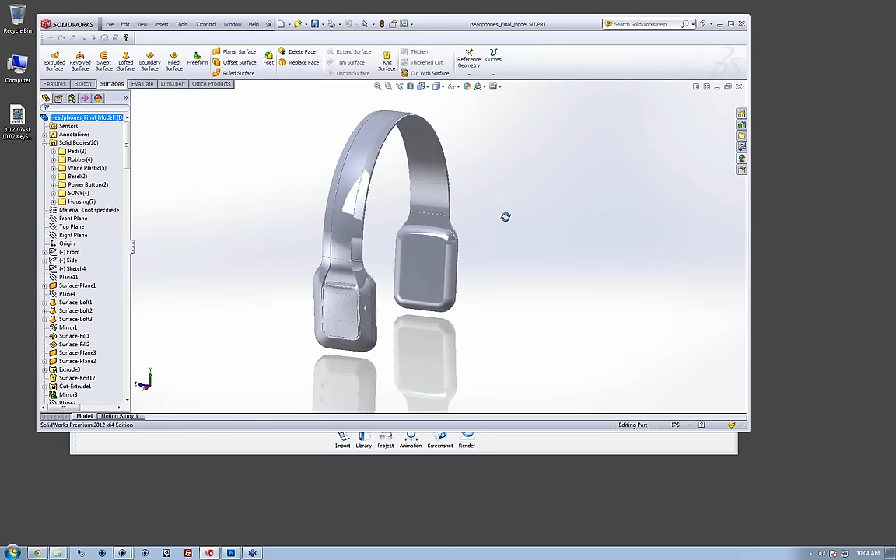So let's open SolidWorks. And as you can see, we have our headphones in a part file here in SolidWorks. And I haven't applied any colors to the materials yet, so I'm going to show you guys how I go about doing that. You could always import your model into KeyShot like this, but you won't have any definition between different materials. They'll all be linked together as one.

You could always go into your scene tree in KeyShot here and select your models and unlink materials for all the models. That way you start from scratch and apply the materials needed. But it's a lot easier to set that up in the modeling software, bring that into KeyShot, it speeds up your workflow a bit.

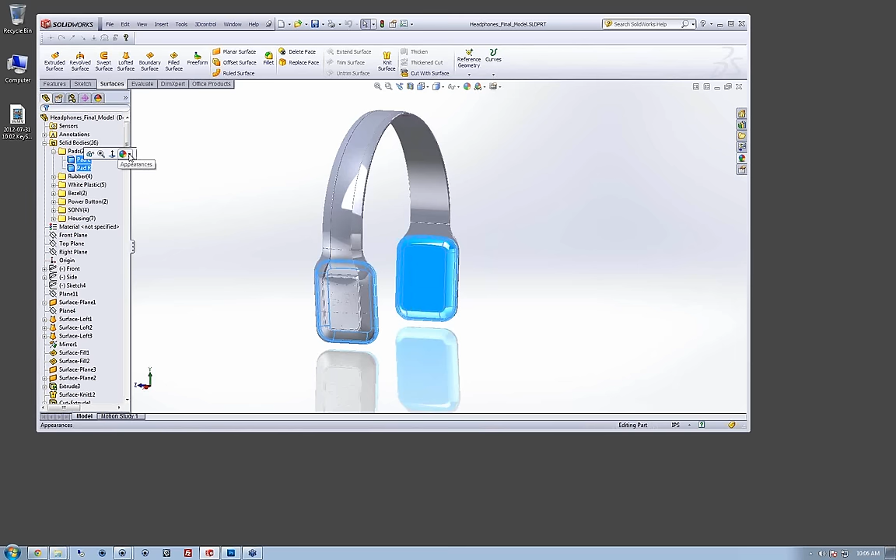Usually what I do is I'll organize my parts into subfolders here. So to add a color to my pads here, the left and right pad, you can select both of these using the shift key, and then this little dialog comes up with your appearances. So then we can go down to the body level of this material and we'll set that to be a black.

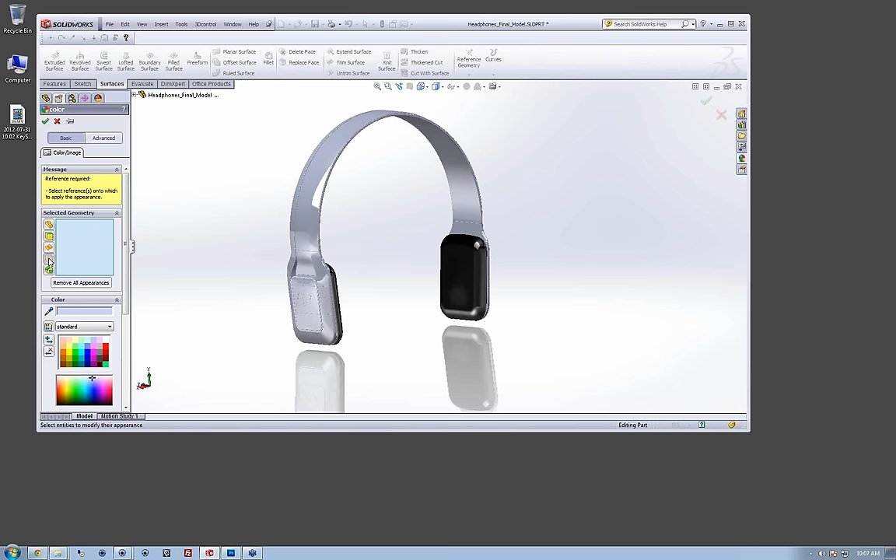And then you could also do it another way by pressing your edit appearance button here, and we can clear these selections. You can see here this selected geometry window allows for part, face, surface, body, and feature. So if we have this box highlighted here, we can come in and first we'll have to set what we want here. So I'm going to go by bodies, and I know this is a body here, here,

on the underside and here. So we'll color that a gray.

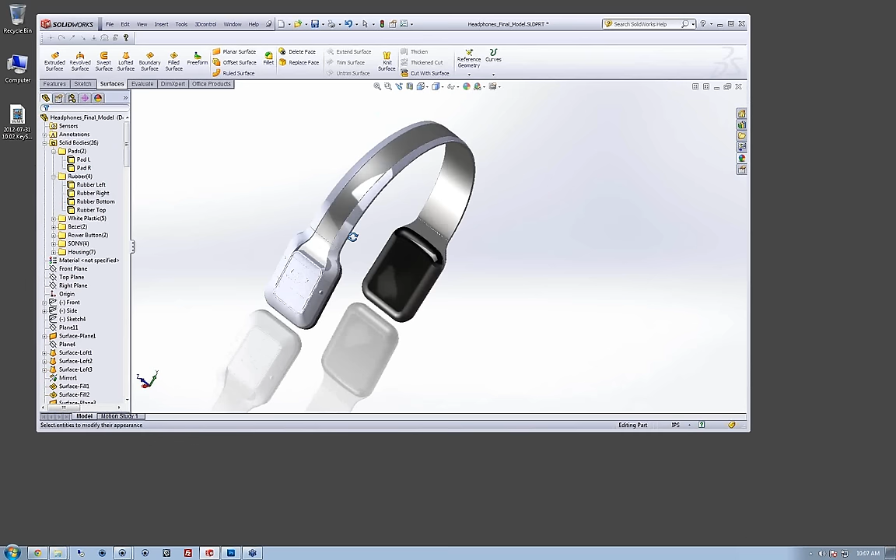All right, so let's just continue quickly with the rest of these materials. We have our white plastic. Go to the body level, make that a white.

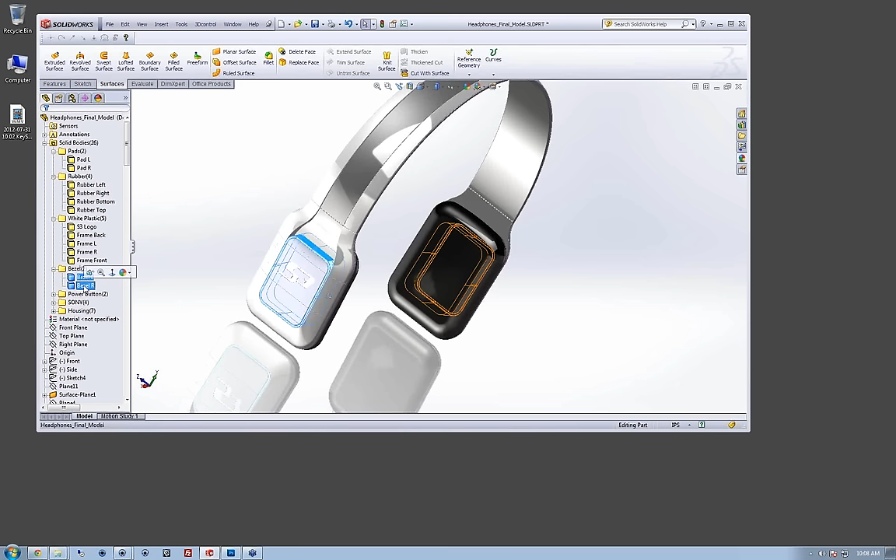And sometimes you might see bright colors, and that's just to show a clear difference between the materials. So for here, we want to make this a blue. Now, if you're choosing two colors that are close to each other, KeyShot might confuse that. So it's best to choose colors that are quite different.

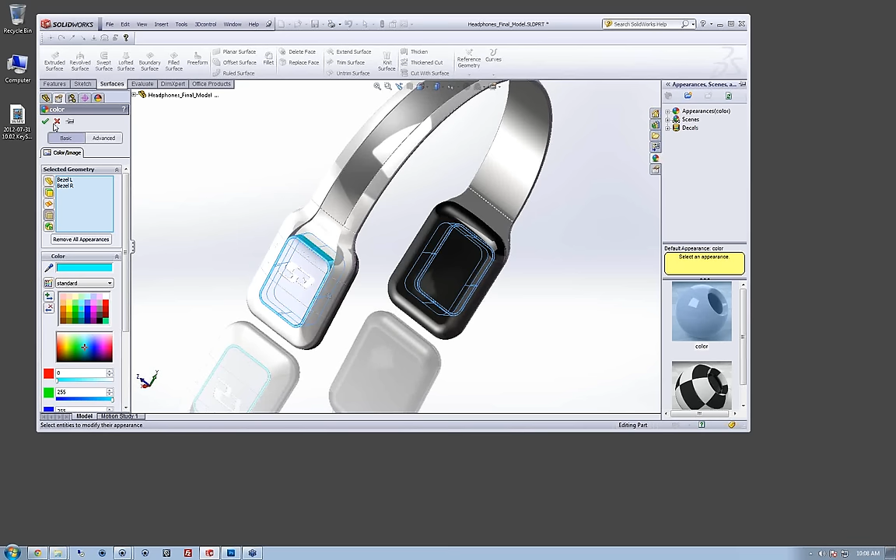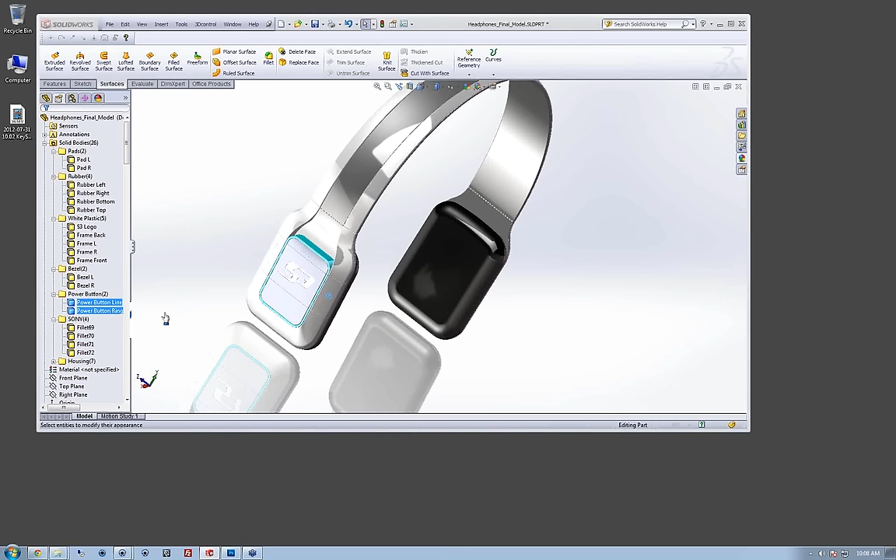But personally, I like to set this up to get an idea for what the colors will be once I bring it into KeyShot as well. We have our power button. Make that yellow so it stands out. And our Sony logo.

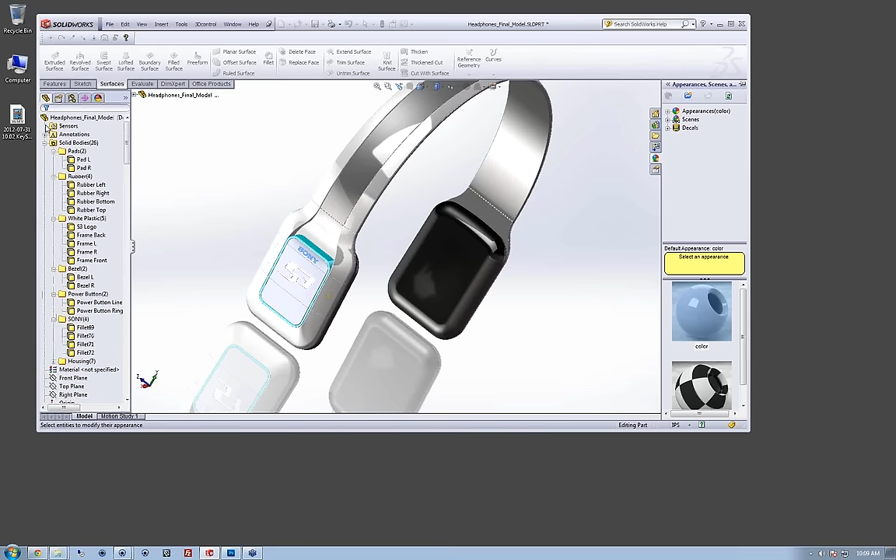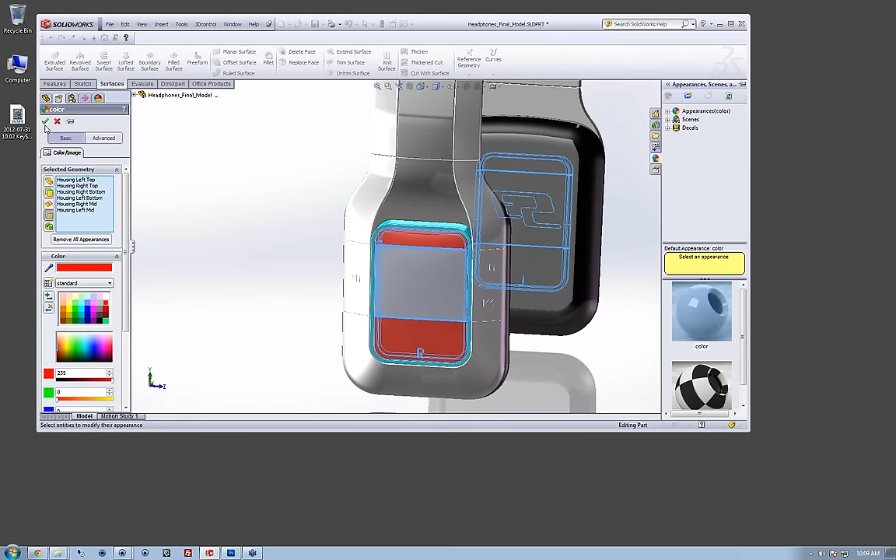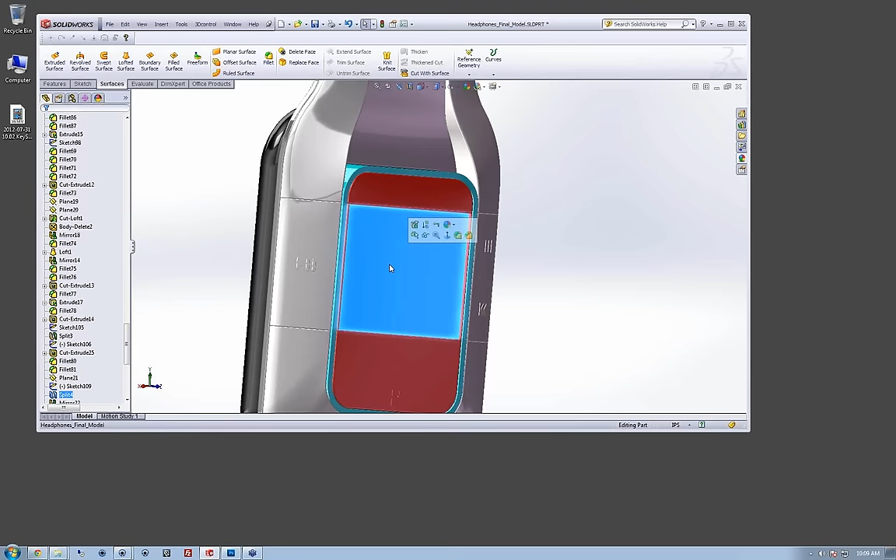We have our housing here. This display is actually a screen that will be a different material, so I'm going to deselect that. Okay, get my display. And then let's hide this, and I'm actually going to be applying a label to this surface in here, which is going to be the screen behind that glass display.

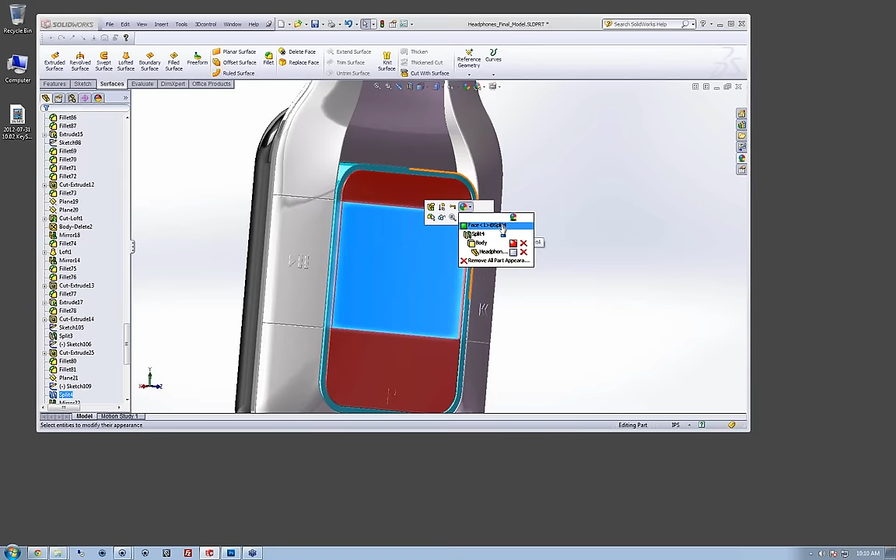So this has already been colored in the feature tree here, but we can go ahead and select this face only and change the face level to be a different value or a different color, and that way we'll be able to apply that label only onto this surface, and this will be unlinked from the rest of this housing here.

So I think that's it. We have all our parts with given colors here. We'll show our display, make sure that's there. But before we go ahead and import this into KeyShot, I want to show you guys something that we get some requests for in support. Seems to be an issue that people run into a lot.

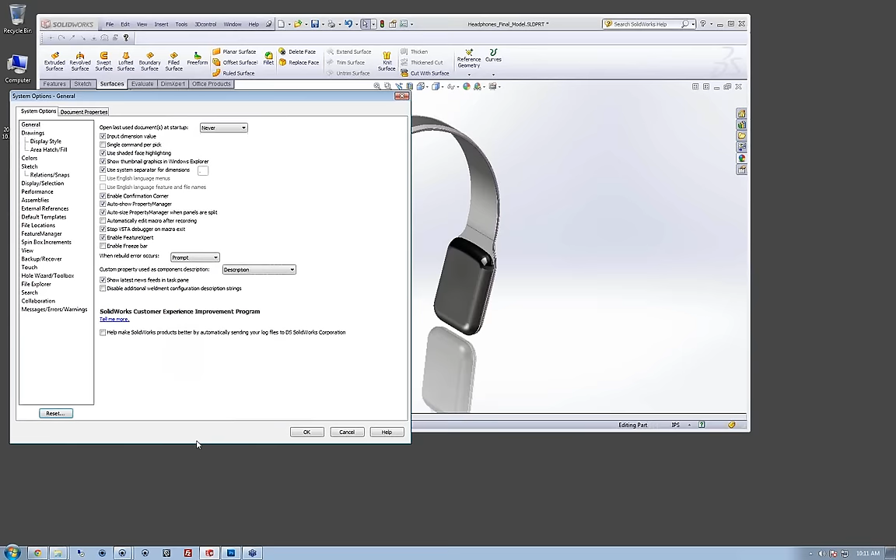So if you go up to your options button here, or you can go tools, options, document properties, and image quality. So here you have essentially your tessellation value for your part. Now this is the default setting here, about midway, and this might be fine for the majority of your products, but if you have something with complex surfacing and curves like you can see here, we may want to crank this up.

Now you can go into the red zone here, but be careful because the document size, the file size is going to be significantly increased, and the loading time into KeyShot and saving time is going to be a bit slower. So if you can, try and stay out of the red.

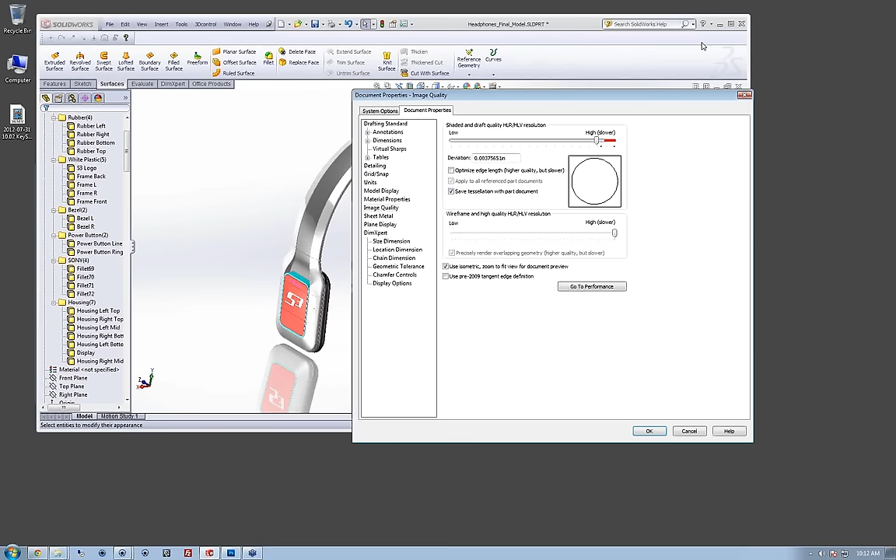So before we save this, let me bring up KeyShot.com here and just show you where the SolidWorks plugin is located. So resources, downloads, and plugins. And scroll down here. If you have SolidWorks 2011 or 2012 and KeyShot 2 or 3, you can go ahead and download that. And once you have that installed, restart your SolidWorks or your modeling software, and you should have a button that shows up here. Oh, looks like we have to install it. So let's go back and continue that download.

How's the volume? Hope everyone can hear me all right. Let me know if at any time I'm speaking too quietly or if I need to speak up.

So let's install our plugin here. Okay, and we'll save this with all our colors applied, and we'll need to restart SolidWorks in order for that plugin to take effect.

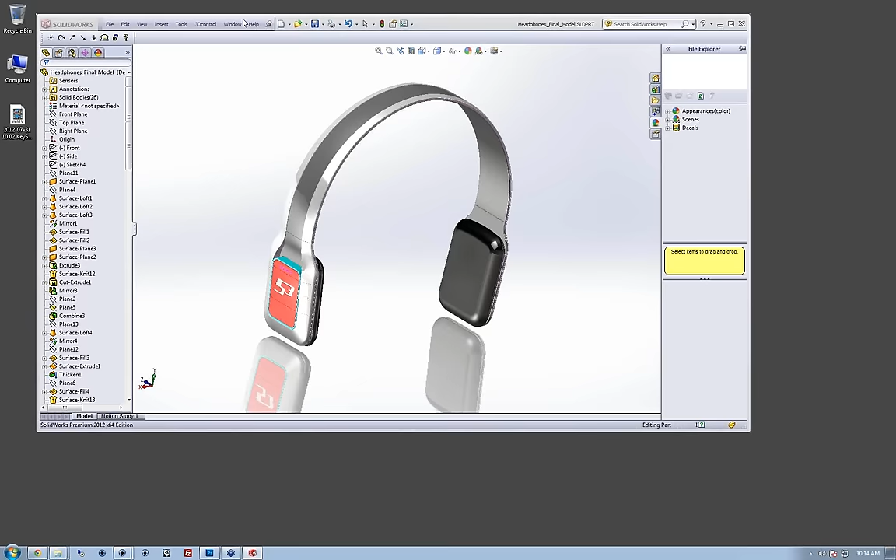Well, looks like not quite showing up here. We'll have somebody work on that and find out what the issue is there. Bruno, you want to figure out what's going on with that?

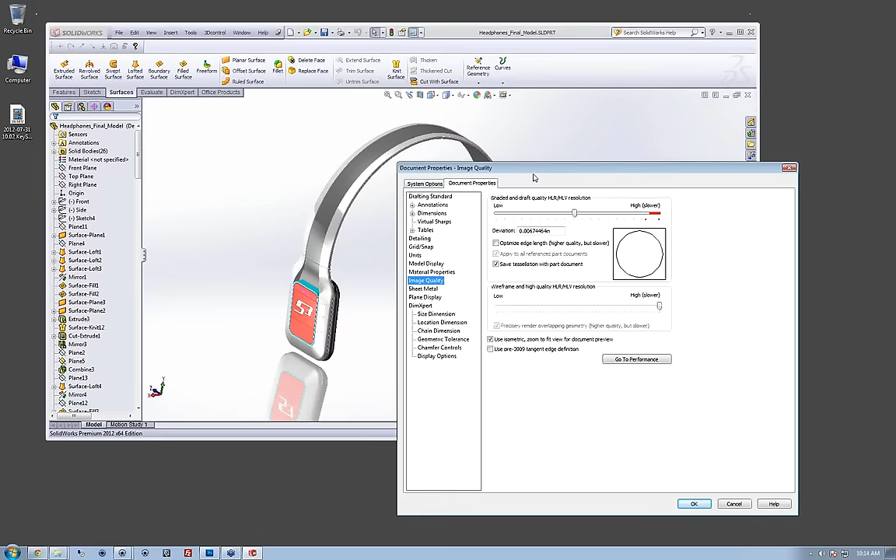Okay, so let's go back up to our tessellation quality here. If you do crank this all the way up into the red, which might be necessary depending on your model, I wouldn't recommend importing using the plugin. It's more stable if you just import default into KeyShot using the import button. But for today, we'll probably be good around here.

Another thing is you want to make sure you have this checked: save your tessellation to the part document. Saves all that file information there, so when you bring it into KeyShot, you have that tessellation saved. And it's going to take a moment for that to rebuild and tessellate.

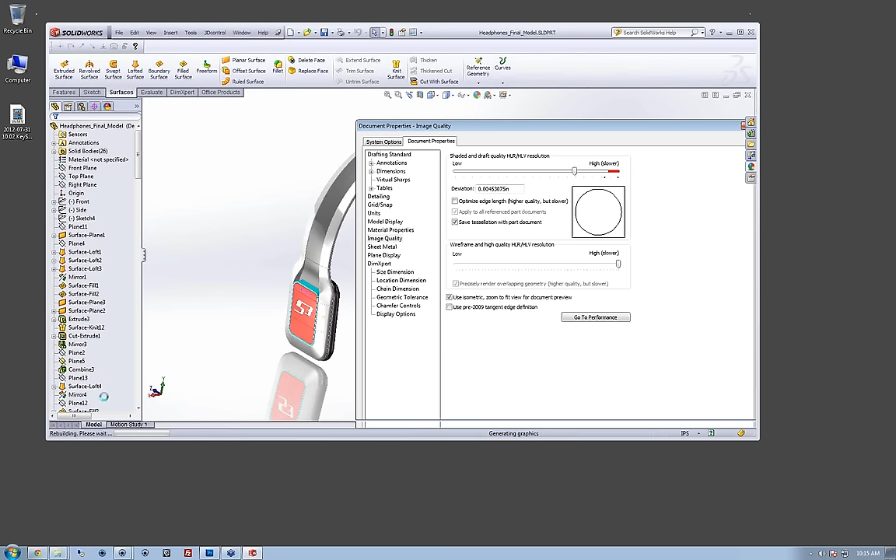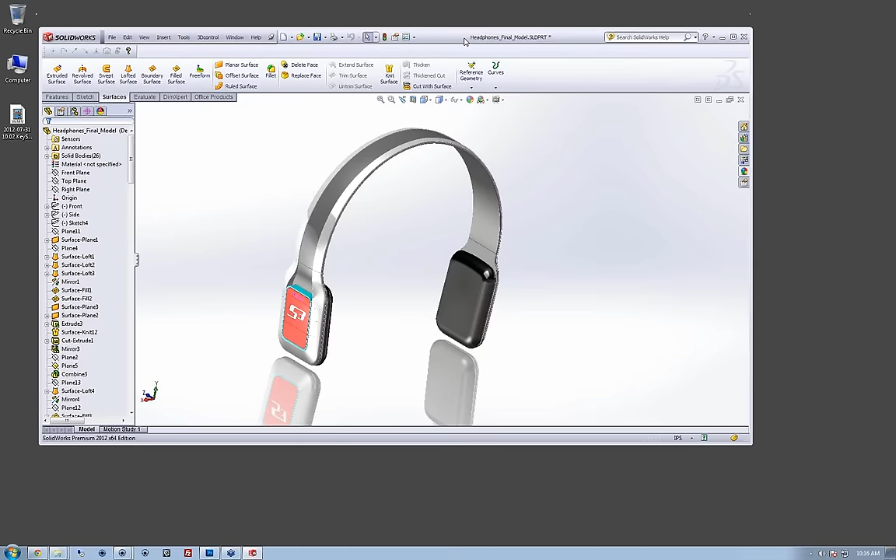So if we had our plug-in here, we might need to restart the computer. Actually, that might be the reason why it's not showing up there. Yeah, I just restarted SolidWorks. We probably have to restart the computer for that to take effect. But for now, we actually have a beta importer that I want to show you in KeyShot here.

If we go to import, and we could just select any file here, let me show you. If you click on your advanced settings here, actually this needs to be a part file, so let me just bring these headphones back in here. So if you bring in a part file, click on the Advanced tab, and then you'll see this tessellation quality adjustment here. Now, this only takes effect if you have your new importer or beta importer checked.

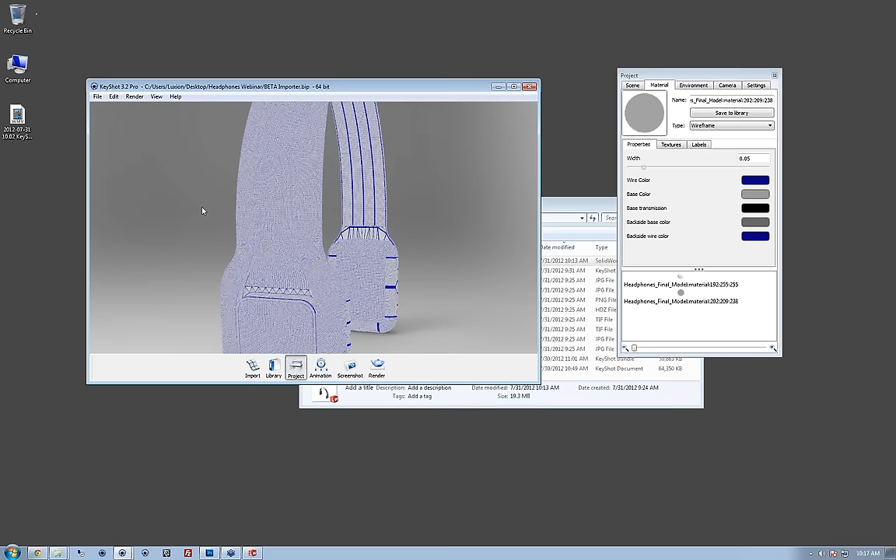So this takes a little bit longer to load into KeyShot because KeyShot has to calculate all the triangulation and tessellation. So here I've already loaded it into the scene using the beta importer. Now, if you go to edit your material, we can change this to a wireframe material. This is pretty handy, a lot of people don't know it exists, but this gives you a clear view of what that tessellation quality looks like there.

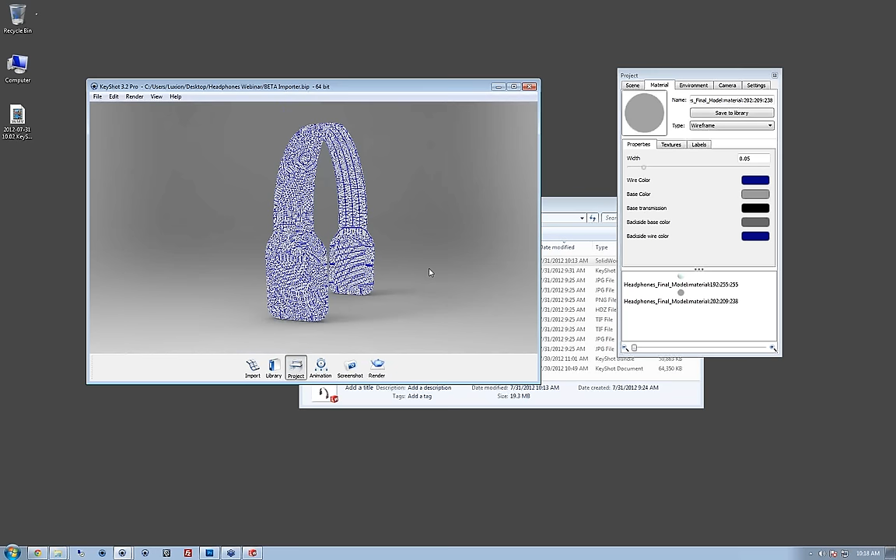And you can see in the area where we have a large amount of curvature, we have very small triangulation, and that's going to be a great surface quality. But again, that increases your file size and your time. So let's hide that. And we'll start a new session here.

So since that plugin button isn't there in SolidWorks, let's try to find it under Tools. Go to Tools in SolidWorks. Okay, yeah, we can. That's a good point. There you go. Make sure you activate it there. Okay. All right, there you go.

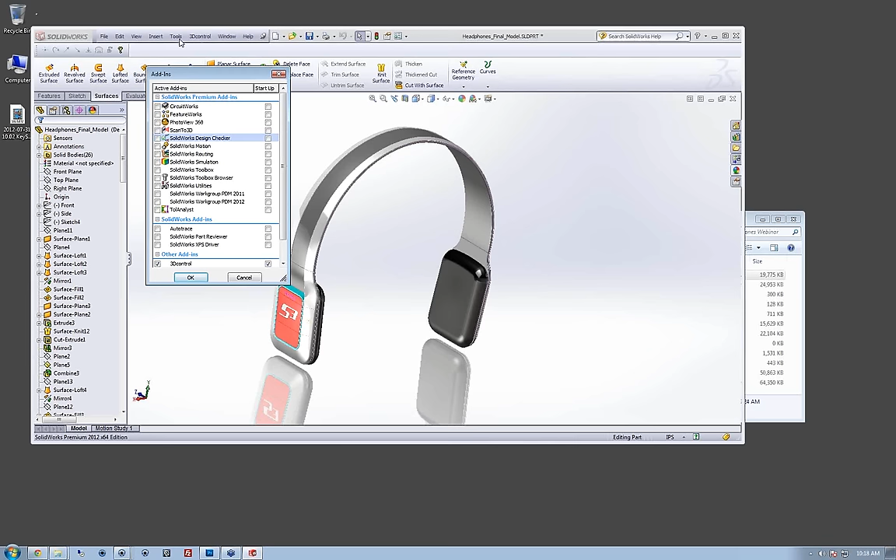So if you aren't seeing your plugin button, your KeyShot button here in the top panel, you can go into your add-ins, or again, Tools, Add-ins, and make sure you have KeyShot 3 active and running on startup.

Okay, there we go. So here's our KeyShot button, and all you have to do is click render, and it should send these headphones right on over to KeyShot. Takes just a moment for that to load.

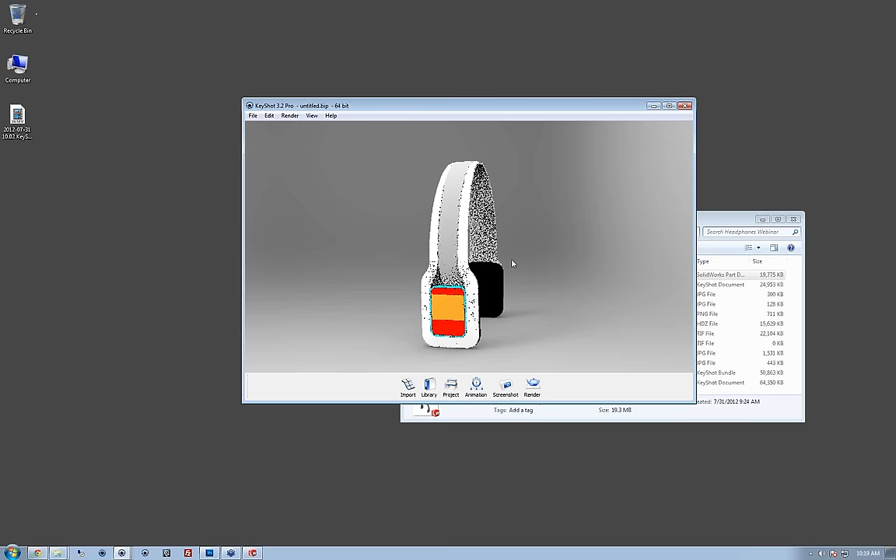Okay, so we have our colors that we applied in SolidWorks, and for a comparison, let's take a look at this in a wireframe, and you can see the triangulation of this part compared to this one is a significant difference.

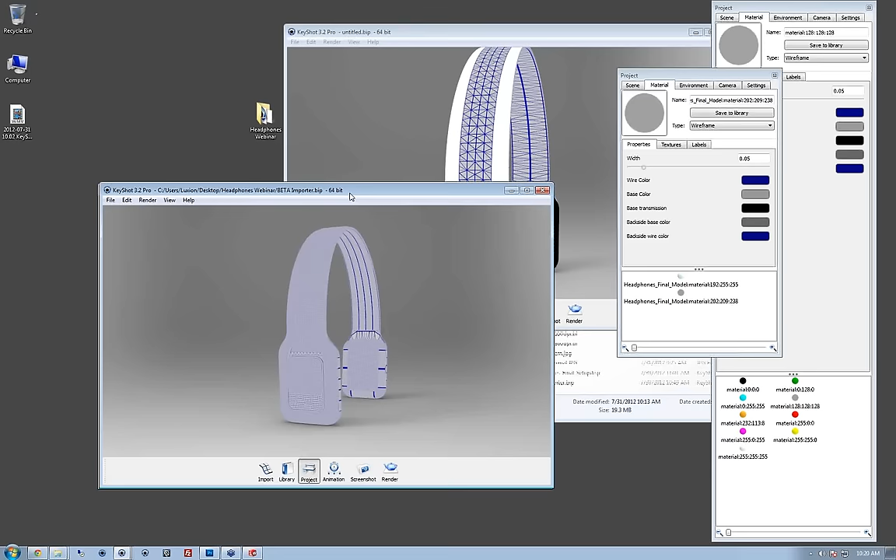So if you're ever finding artifacts in your shadows, or you see rough lines, or your curves aren't as smooth as you would like them to be, you could either crank up that tessellation quality in SolidWorks, Document Properties, Image Quality, or you can use the beta importer with KeyShot and go under those advanced settings and crank that up there.

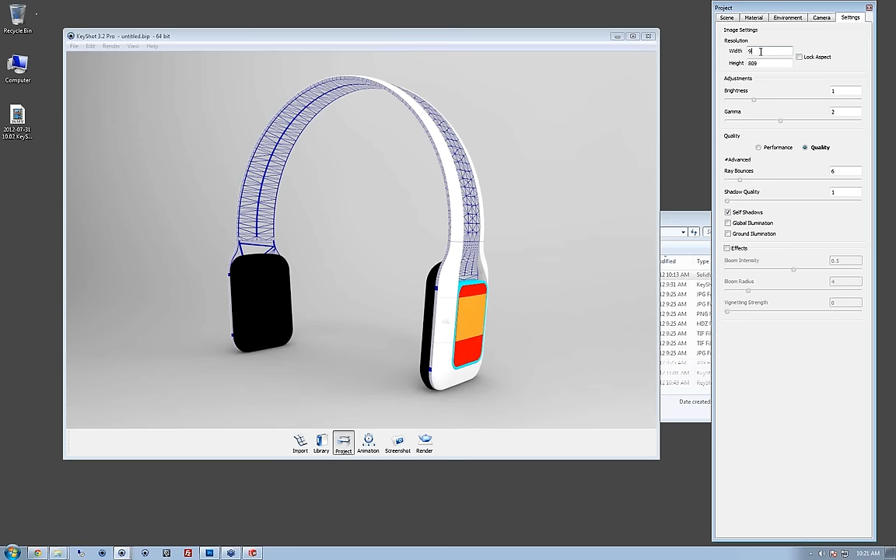Okay, so let's go ahead and get started here, applying some materials and whatnot. But the first thing I like to do when working with a product shot is, usually I'll know what my final output will be, and I like to work with 720p aspect ratio. I'll set this to 960 by 540 and lock that aspect ratio. So that way when I go to render, I can render it at 1920 by 1080, and it'll fit the view of the display nicely.

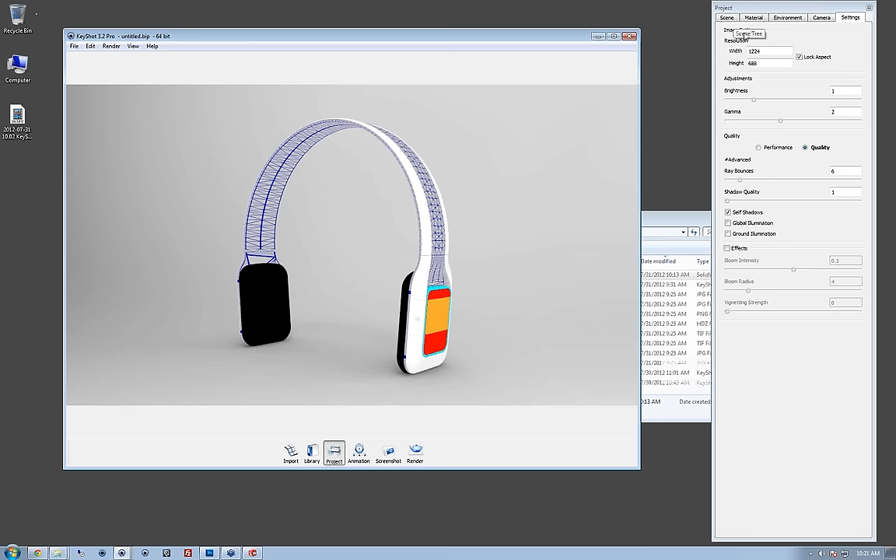Okay. So let's go ahead and get started with our material assignment. Obviously this wireframe is not going to be our final material, so we'll change that. You can do that a couple of ways. You can double click that material to bring up your project window, and you can change the type, or you could bring up your library, which is toggled using M.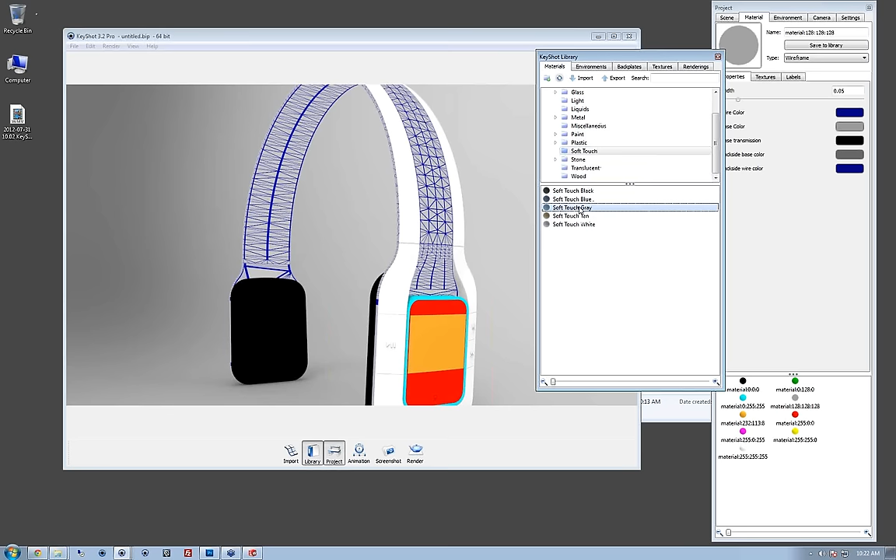So there's some pretty nice materials already created here in the KeyShot library. We have a soft touch gray. I'd like to use that for this rubberized kind of material. So these are some sport headphones, wireless sport headphones, and we wouldn't want this to be a hard or a smooth material that would slip on your hair or whatnot, so add a little bit of softness there.

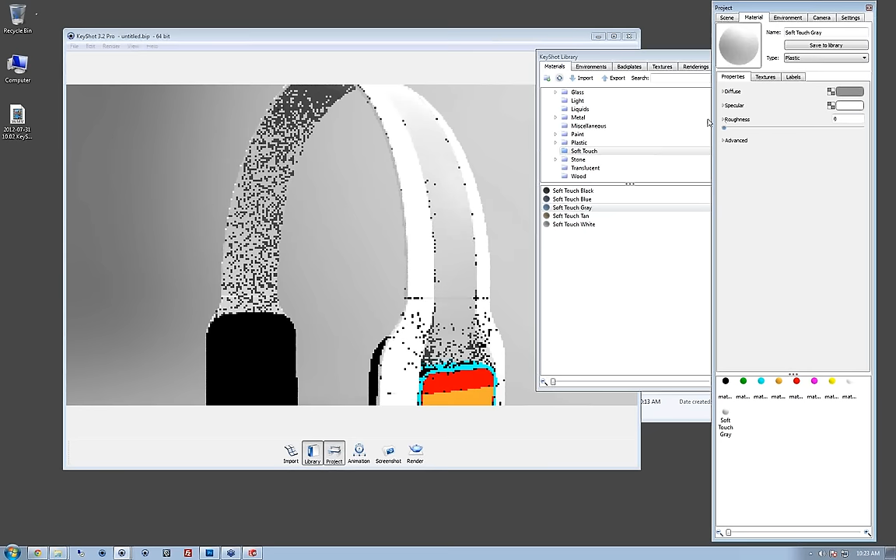So we have our roughness value here, which changes the roughness of the material. But if that's not enough, you can always add a texture. So here you can do this a couple ways. You can click the check mark to find a texture and load it up.

You can go into your KeyShot materials library, find the texture you'd like, drag it on there, and when you do so, it gives you the option of adding it as a color, a bump, opacity, or a label depending on your material type and your texture applied. So we'll delete that for now. You can always delete your textures by selecting them here and clicking on your little trash can.

But I have the textures that I've used here already saved in this folder, so I'm going to find the one I'd like. For this soft touch, I'm going to use a normal map. So here you can see this texture is kind of this bluish and purplish tone, and this is called a normal map. And a texture like this would be just a straight up bump map.

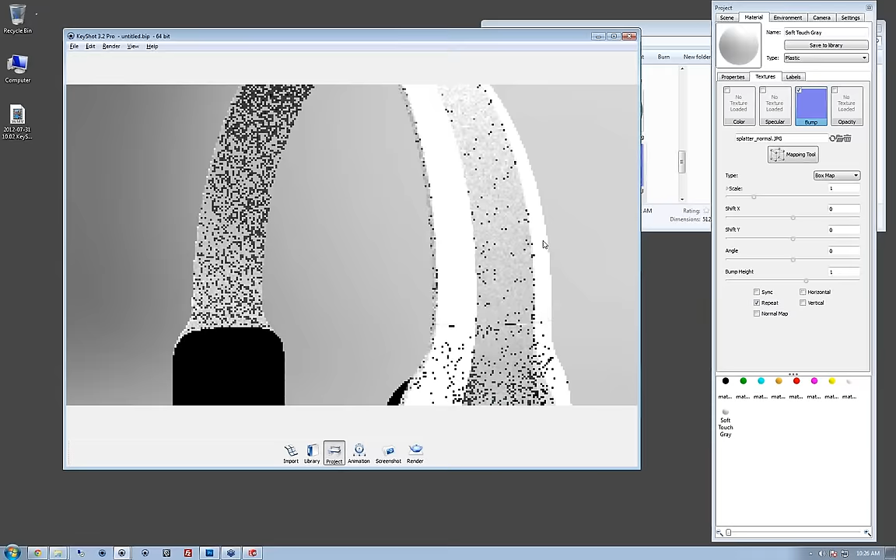So if we double click on that material, go into our textures and our bump, we see we have it projected as a UV coordinate type. Now this is something that I rarely use, so for this case a box map should be fine. And if we zoom in here, you can see how that texture looks.

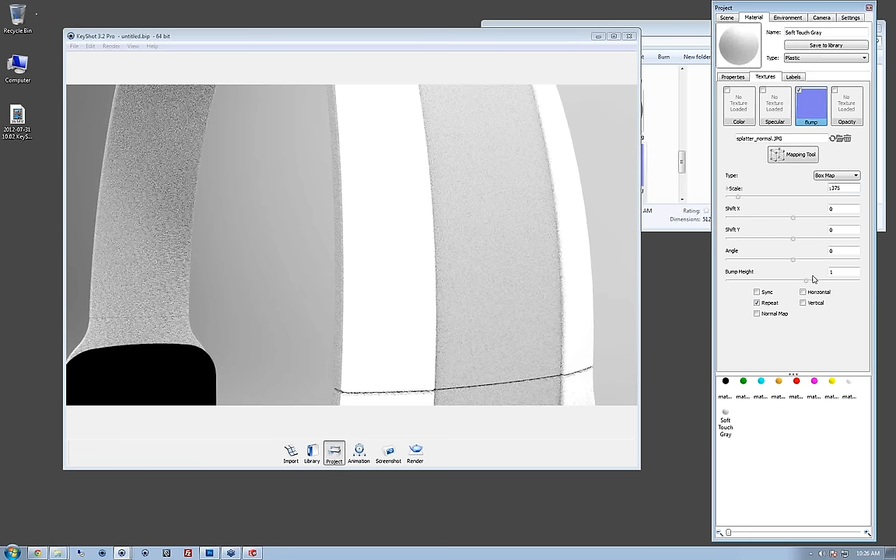So we'll probably want to bring down the scale of that, something a little bit finer, and also bump height, bring that down, maybe not quite so much.

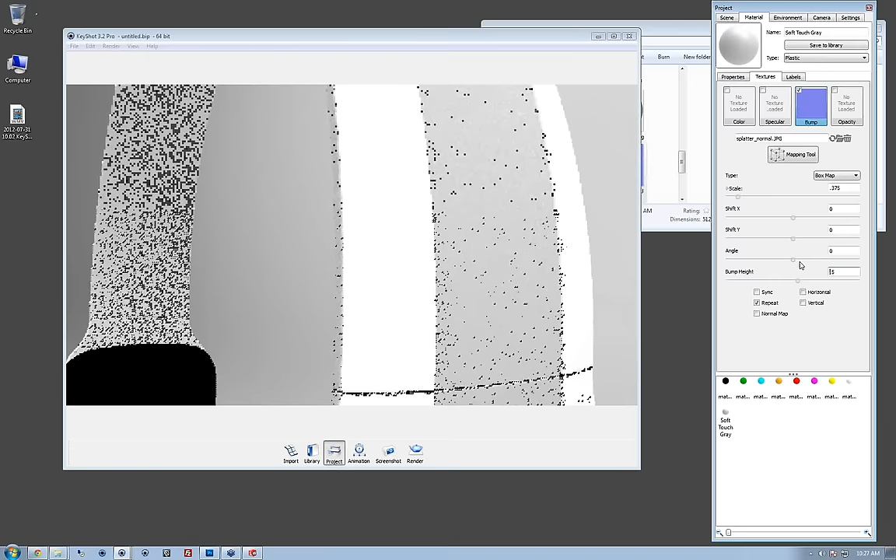And then another value that you want to pay attention to is the roughness. So the bump height and your roughness, there's really a fine balance between the two. Usually I'll just set a bump height which seems reasonable to me, and then I'll go back and end up adjusting the roughness a little later when I have my lighting applied in order to convey that material properly. So for now, we'll just leave this at 0.2 and move on.

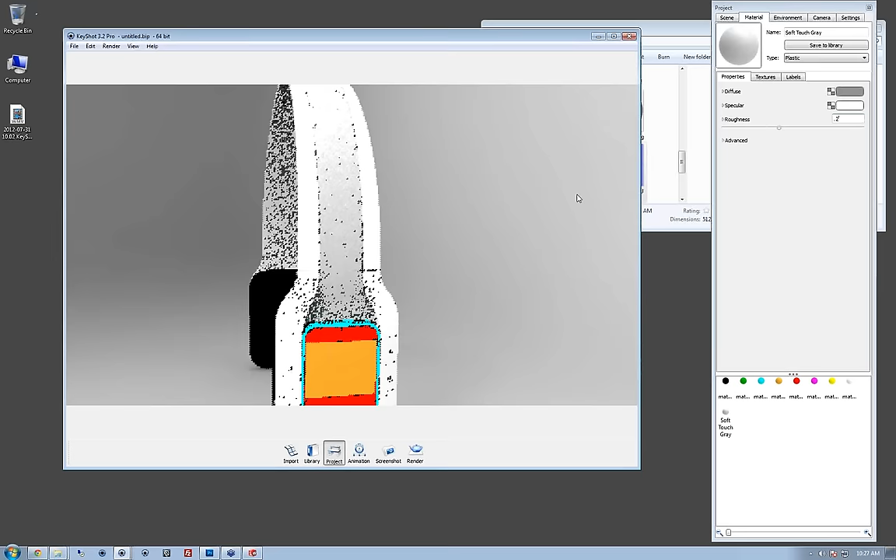So let's go ahead and apply just a regular bump map to these pads. We can go into our materials library and search for something like rubber and apply that. So obviously these two pads were linked because I made them both black in SolidWorks, and changing the color of one is going to change the color of the other.

Okay. For now, we'll keep those black. And again, we'll add a bump to that. So let's find our texture here. Drag it over. Sometimes it can be a little tricky to see what you're doing if you have this set to pure black. So what I like to do is maybe bring that down to a value of 20 or 15, and I can always adjust how dark I want that to be a little later once I have my lighting set up.

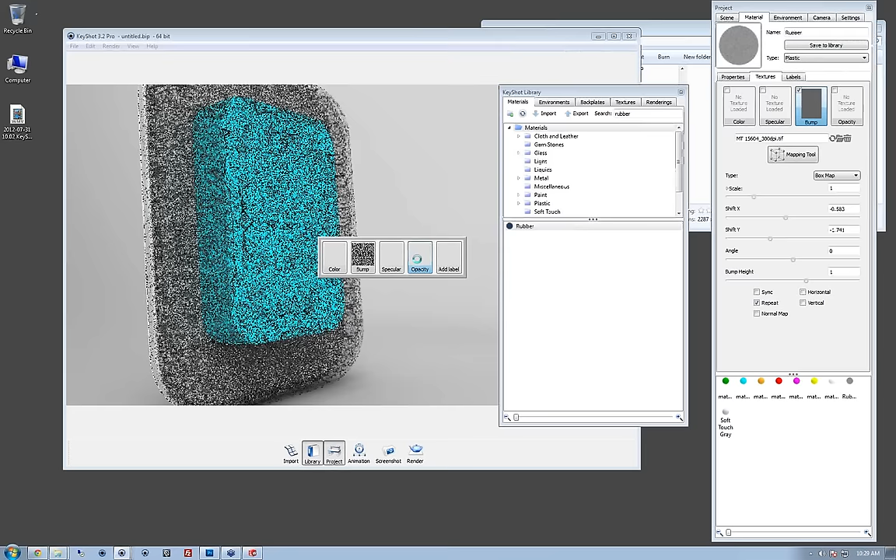So obviously the bump height on that is too high, and we have it set to UV coordinates. Box map should be fine. So let's see here. A scale of 1 looks about right. And the bump height looks okay too. Now this is going to be definitely a finer texture if this was a foam type material. And we could even go in here, take our same texture and apply it as an opacity map. If we go back to our bump and check sync here, it should sync up our two textures.

Now this texture has way too much white information in there, and that's why it's making it pretty much transparent. But if we had a texture and we removed some of that white, you can imagine how it would show opacity through this foam material. But that's not working for today, so we'll remove that. And for these cases, that looks fine for now.

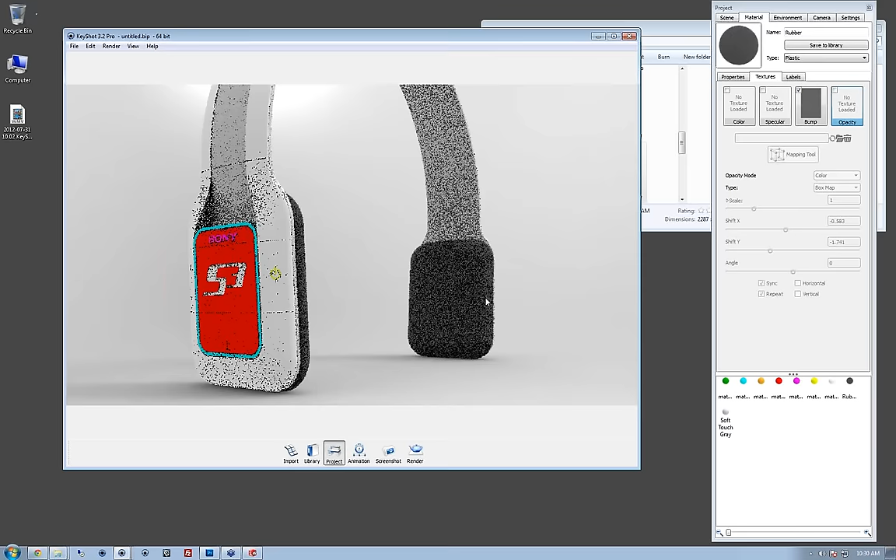Could you explain one more time why you chose rubber versus soft touch? It's really just a matter of preference in choosing your materials between the rubber and the soft touch. There's not a huge difference. The rubber is going to be a little more rough, but we brought that down, and you can see the rubber is actually a plastic material with black diffuse and a specular that probably could go darker in order to remove those highlights.

And then for our soft touch material, this is also a plastic, so essentially they are the same material types, but here you can see the specular on the soft touch is a white, so it is going to have those white highlights. Something that is this kind of harder rubber material would show more highlights than the softer type of rubber.

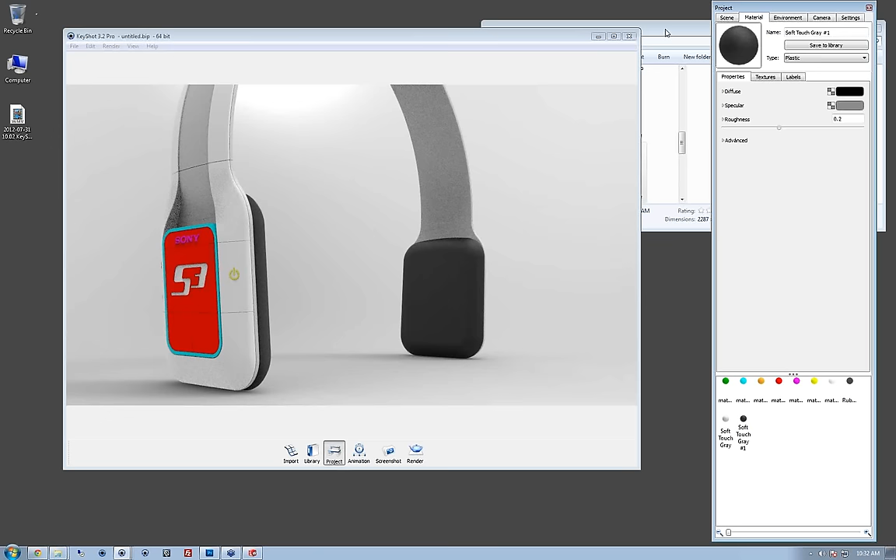So essentially those are the same material types, and if I wanted to, say, apply this bump map to this pad, I can just go in here and unlink that material and change that to a black with a gray specular, and essentially that's the same thing as using the rubber material. I just wanted to show some materials in the KeyShot library, the stock materials that are helpful. So we'll undo that and continue working on our material assignments.

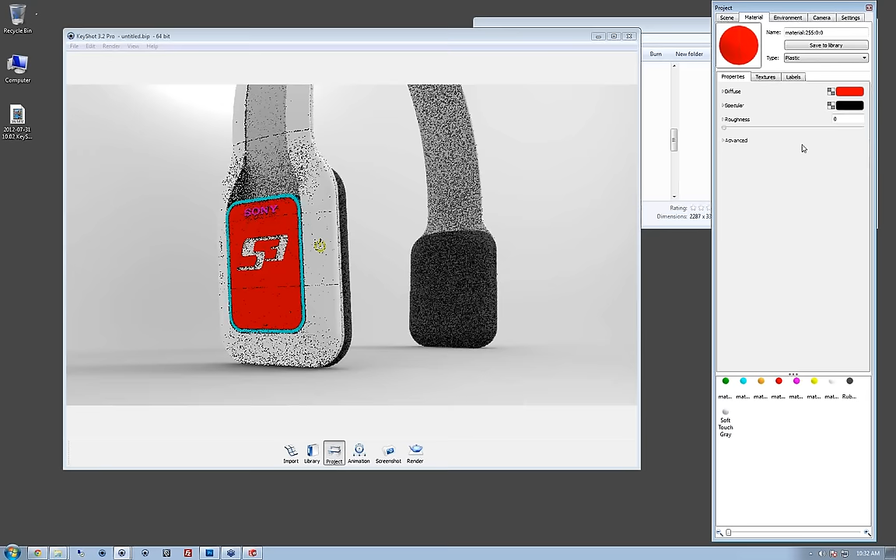So yeah, if we wanted to go in here to this housing and make this a plastic, change the color to a gray, and if we want this to be a high gloss plastic, we'll turn our specular all the way to white with our roughness all the way down to 0. Let's go in here.

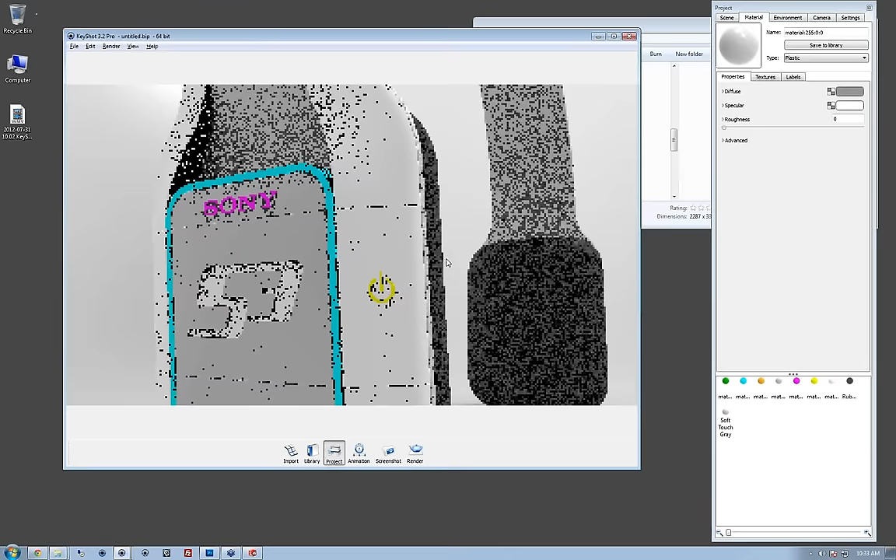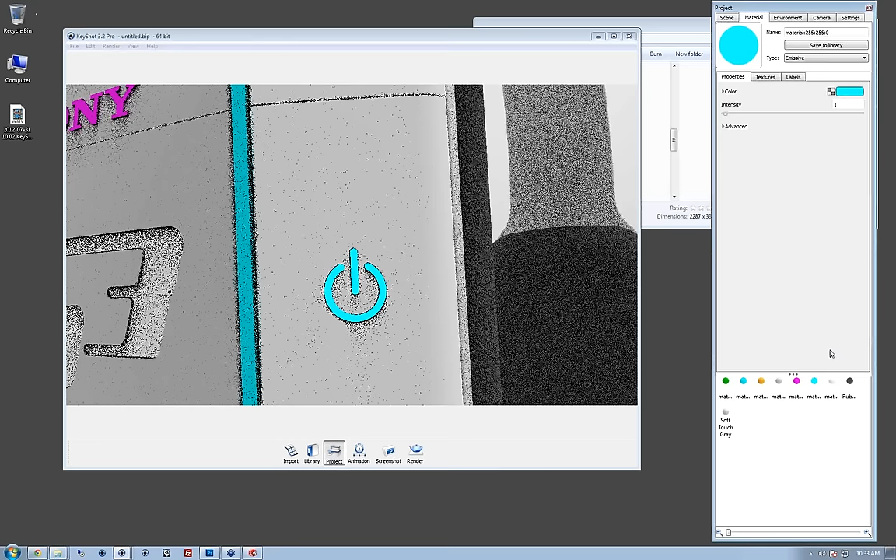One of my favorite materials in KeyShot is the emissive, and if you've seen some of our webinars before, you might have seen this material. I'm going to change that to this kind of blue color here to indicate that our headphones are on, and you can bring that value up to produce a little more glow, but you really won't see any results from that now until you have it in the scene and have other things that it could be reflecting off of to show that light.

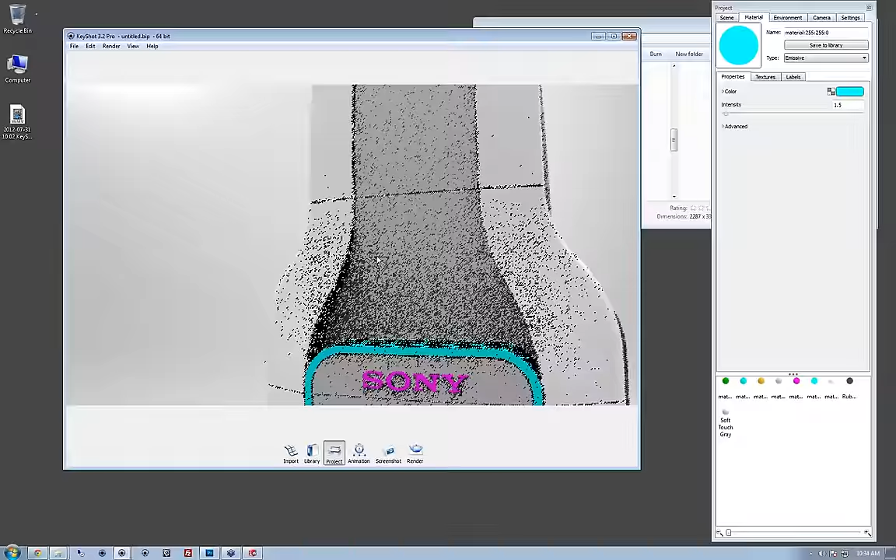For this Sony logo here, we'll also want to apply a bump to that, but we could probably just go into our materials library, find a brushed material, and bring that onto there. Double click your material to edit, and we'll go to our texture tab. We have that applied as a box map. The scale's a little big, so we can bring that down.

And if you're familiar with the Sony logo, it has kind of this angled texture to it. I believe it's the other way, actually. We'll bring our bump height down a little bit. And actually our scale can be smaller as well. Okay, so we'll move on from there. We could actually decrease this roughness, get a little more shine to that material. Okay.

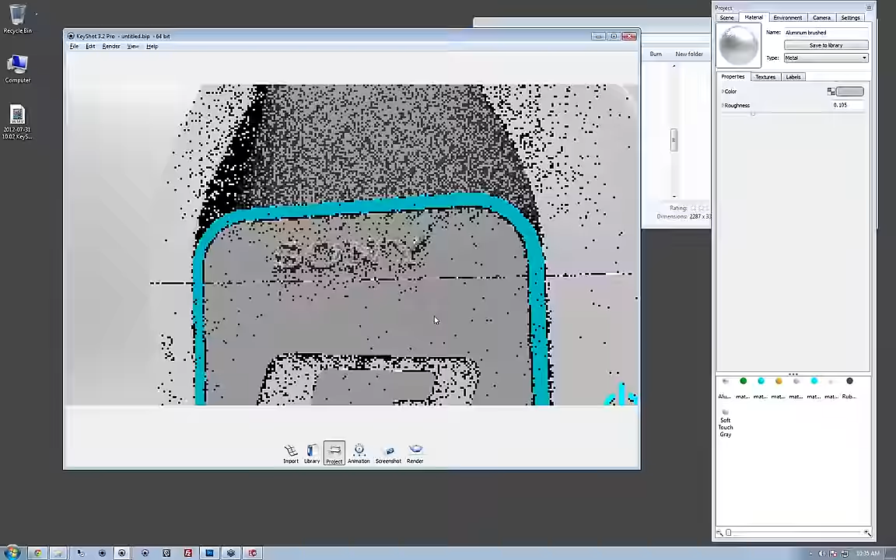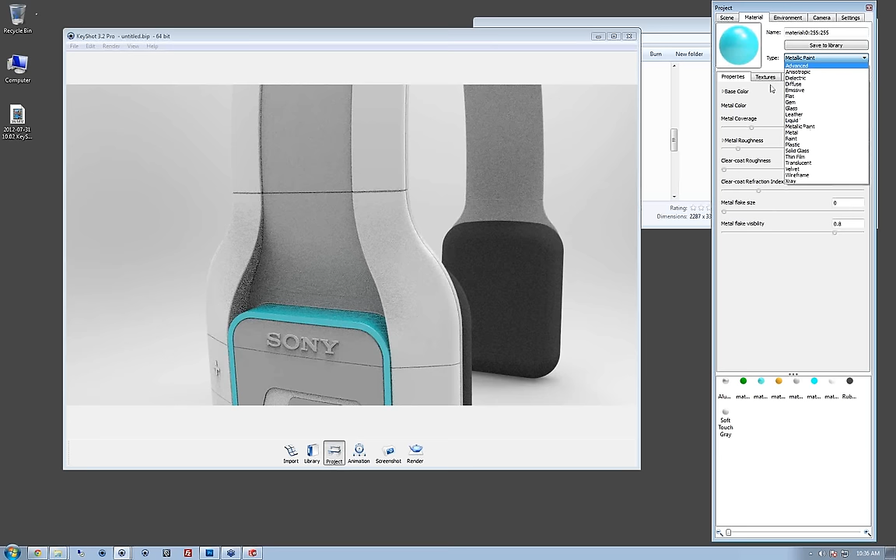Let's go into this bezel here and make this a metallic paint. Now, there's a lot of variables in this material, and some of the other materials such as advanced and others can get a little confusing. So if you ever run into this and have questions and need clarification on what these values do, always go to the manual or the online manual. This is something that I reference pretty much every day, and without it I would be lost, to be honest. So this is your best friend, and you should know where to find it.

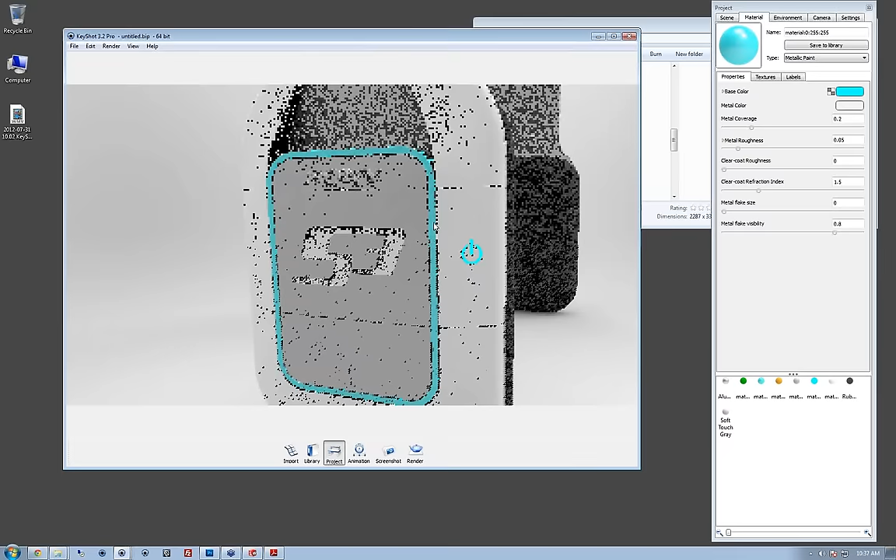Okay, so let's make that kind of a KeyShot blue here. Our base color is pretty much the overall color of the material, and the metal color is going to be the color of the flake of the material. That looks okay. And changing this coverage changes the amount of flake coverage on that material. And there's a lot of other parameters here, but we won't get into that for now. Feel free to play around with these and reference your manual. Find what works for you. Okay.

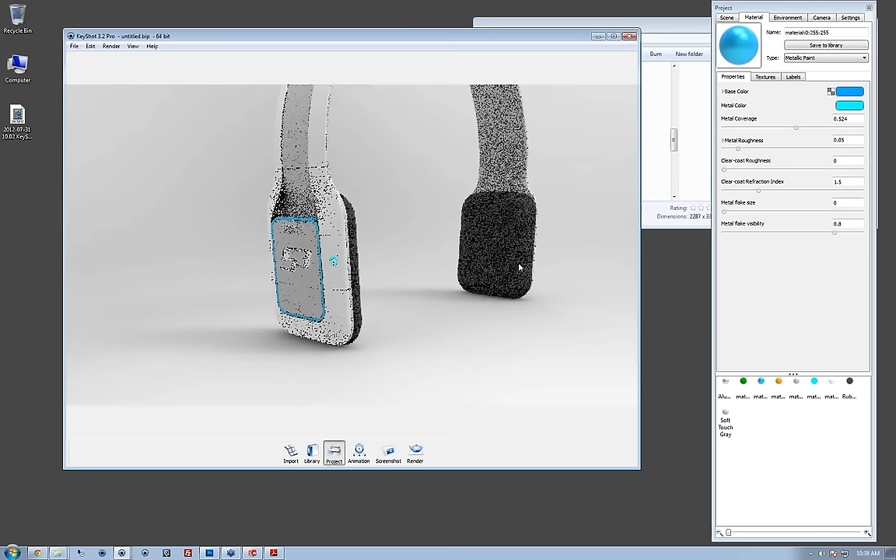Let's go ahead and save this just in case something happens. Always good to press Control S and save your file. As a student, I've been very frustrated working on a project the night before and forgot to save. Something happens. Always save, just to be safe.

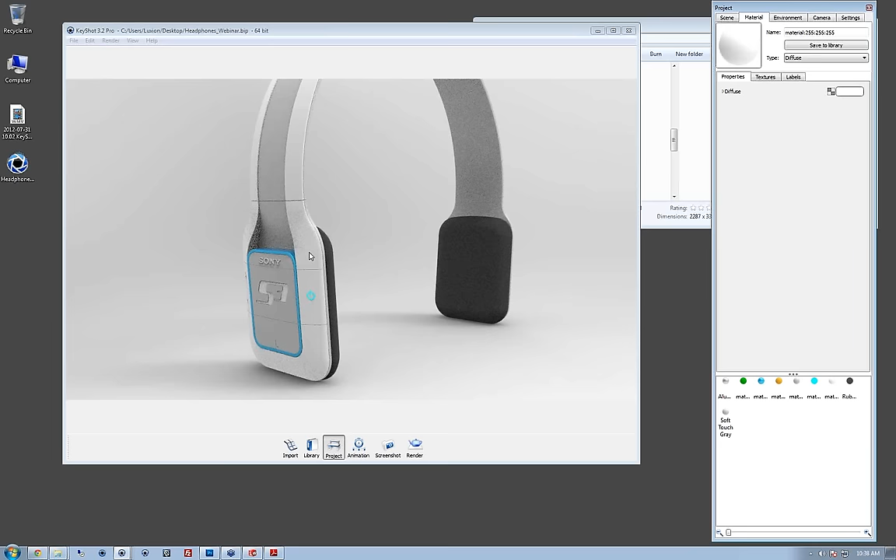Okay, well, let's move on to this white plastic here. And this is a material that can be a little difficult to work with. We've had some customers requesting support in our forums and through our support website. So I'm going to show you a few tricks you can use to get this white plastic to really pop. So first step is setting the material. Obviously it's going to be a plastic type and a specularity of white with our roughness turned down all the way.

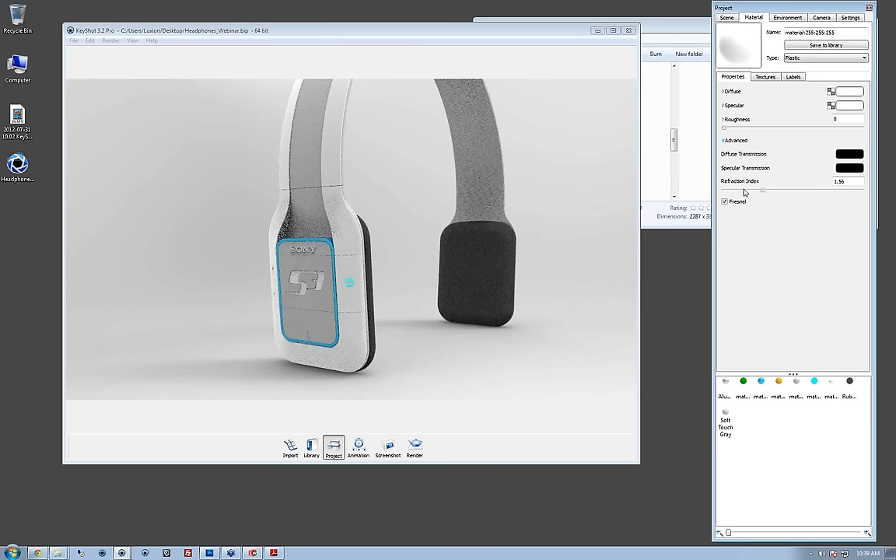Now if you open your advanced settings, you see this refraction index. So this might not show much of an effect now in this environment, but this is a value that you can increase to make the material appear a little more metallic and to really get the high amount of reflections with a white plastic that you would get. So let's set that to 2. We can come back to that later to see how that effect takes place in an environment.

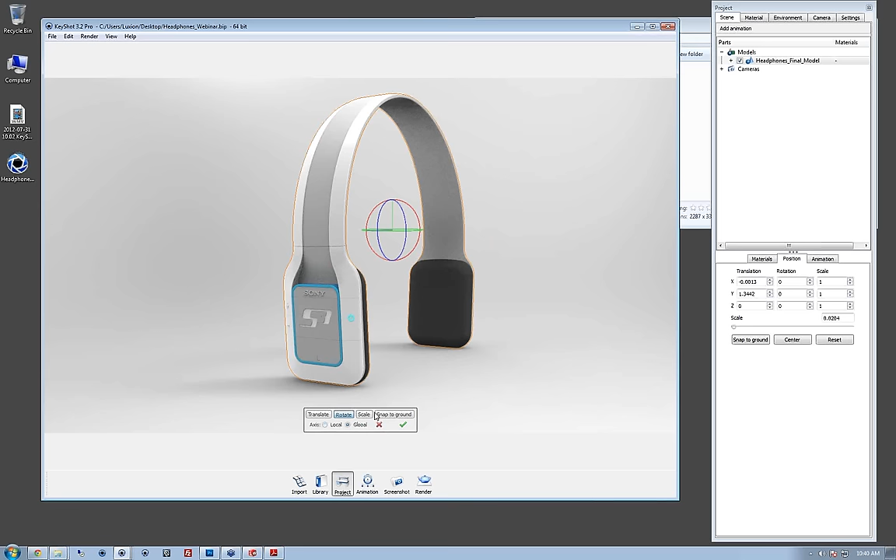Okay, so I think we are ready to get started on some lighting. But first we'll position our headphones here in a little bit more of an interesting way. So if we go into our scene, we can right click to move our object, and we can rotate it on either a local axis or a global axis. So when you first import your model, these axes are identical as long as your model was modeled in the center of your modeling software. So for now, this doesn't matter whether it's local or global, but it will once we move this.

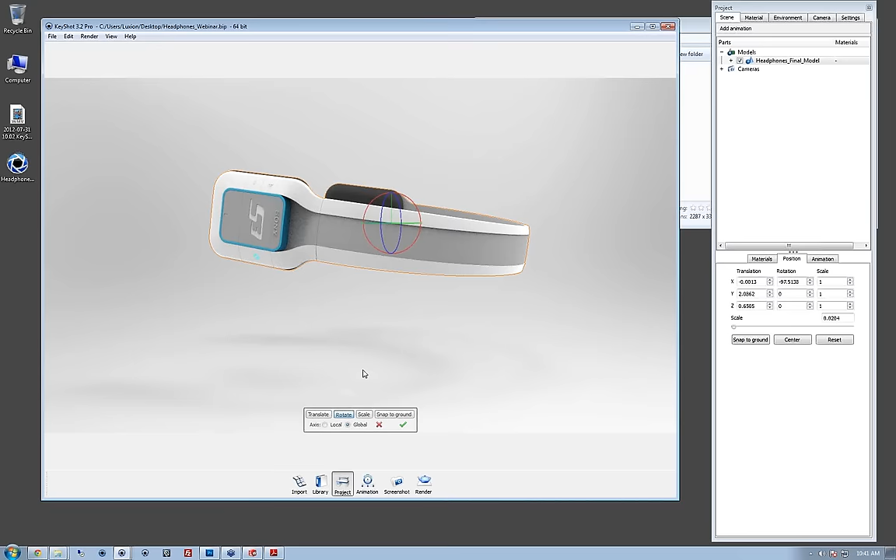So we'll set it there for now and press that check mark. So if we go back into here and move this, now the rotate, you can see the local rotate is actually at an angle. So they are different. Once you move your part, it kind of resets that. So we'll exit out of that for now.

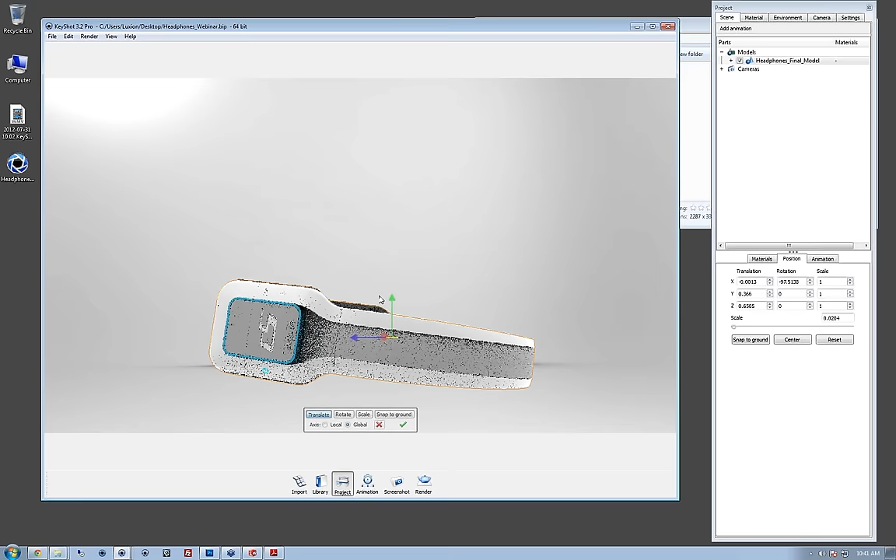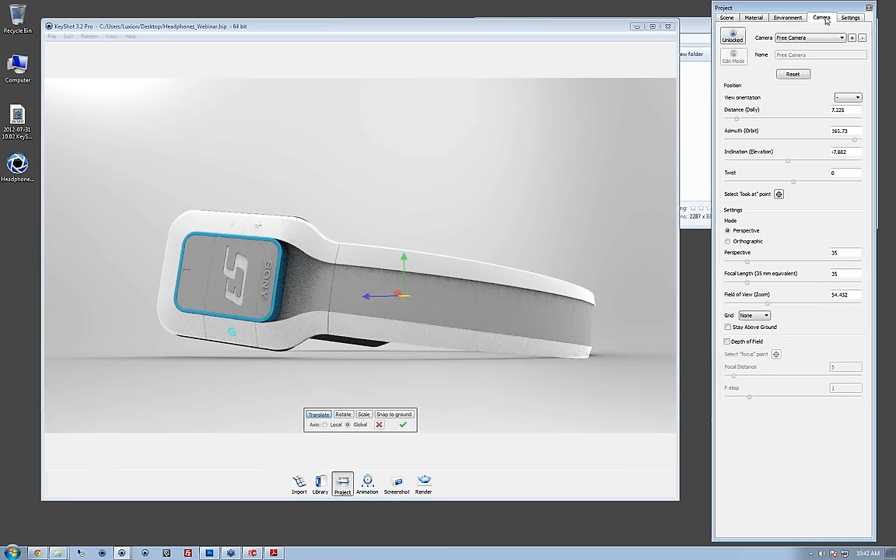I want to show you guys another little trick that I use a lot. People have a tough time making sure that their object or their part is resting on the ground plane here. You can kind of eyeball it if you come down here at a low angle, but you can see here there's still a little interference. A trick I've learned is to go into your camera tab, set this as orthographic, and look at it from a front or a side angle. This probably will work better.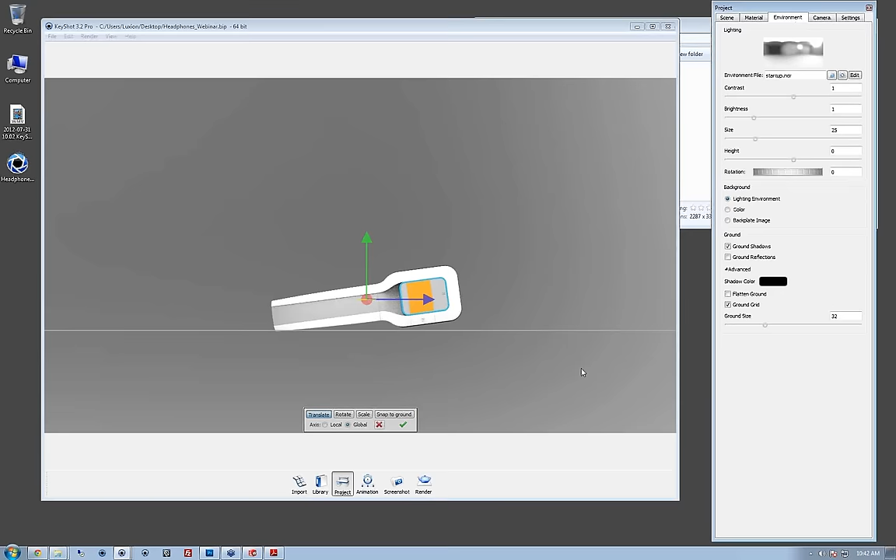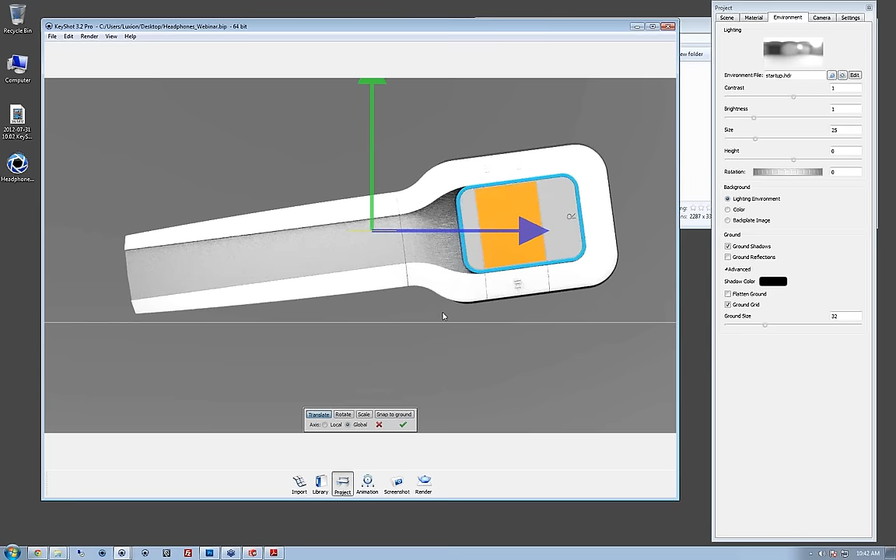And if we go into our Environments tab and show the ground grid, you can actually see the exact location of the ground, and it makes it a little bit easier to line that up. Often snap to ground doesn't find these two low points in order to make that accurate. So now we can just adjust this by eye, and you can see it's going to need a little more rotation here.

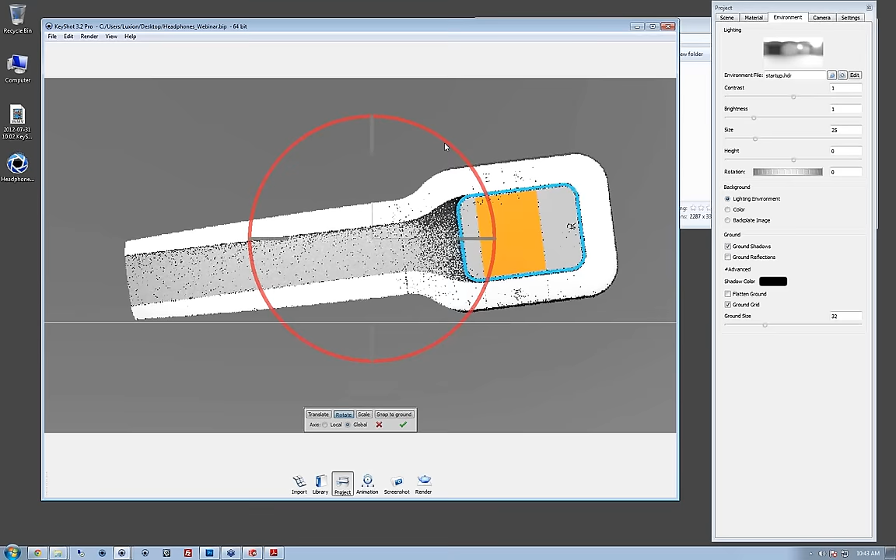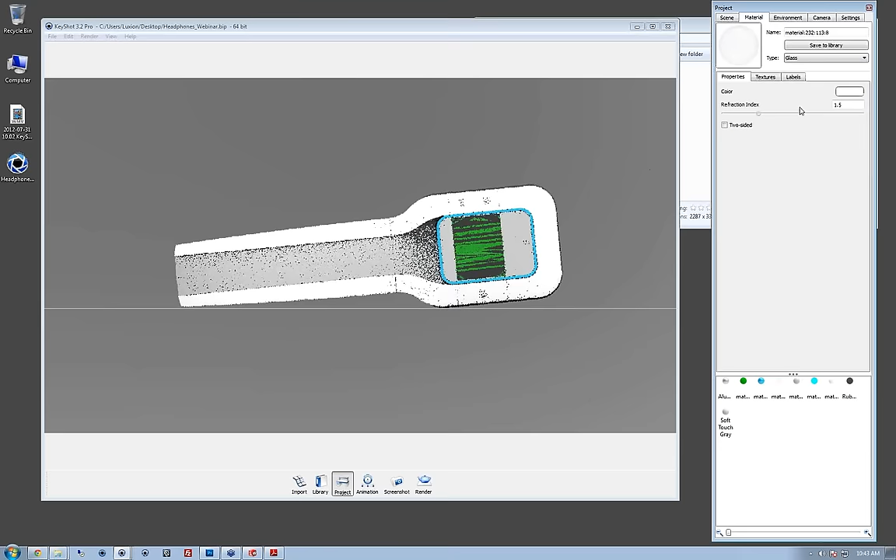Now this is a little tricky, but it doesn't have to be perfect as long as it's not going too far underground there and getting cut off. So that looks okay for now. Forgot this material here. This is our screen, so this will be a glass material. And here we have another material. We can just apply this same color here. Again, unlink that and then apply our label.

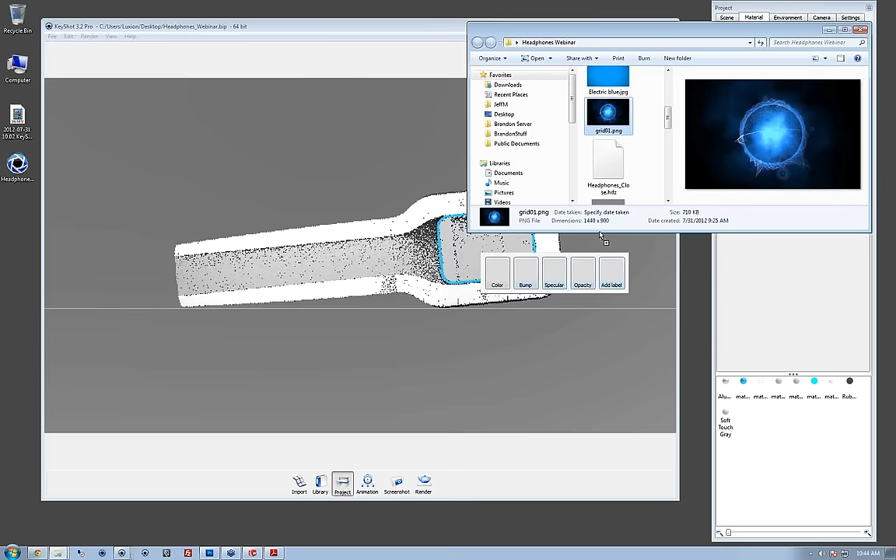So here's just an image I found on Google Images. I typed in music visualizer and thought this would fit the theme nicely. Well, it looks like I added it to the wrong material here, so undo that. If we double click here, we can go to our labels tab, check the checkbox and find our label this way. That way you know for sure it's going onto this surface.

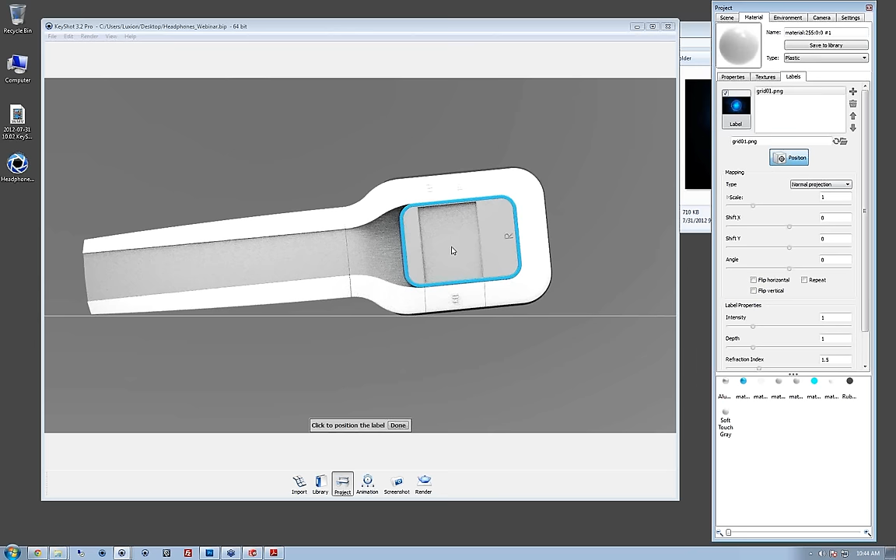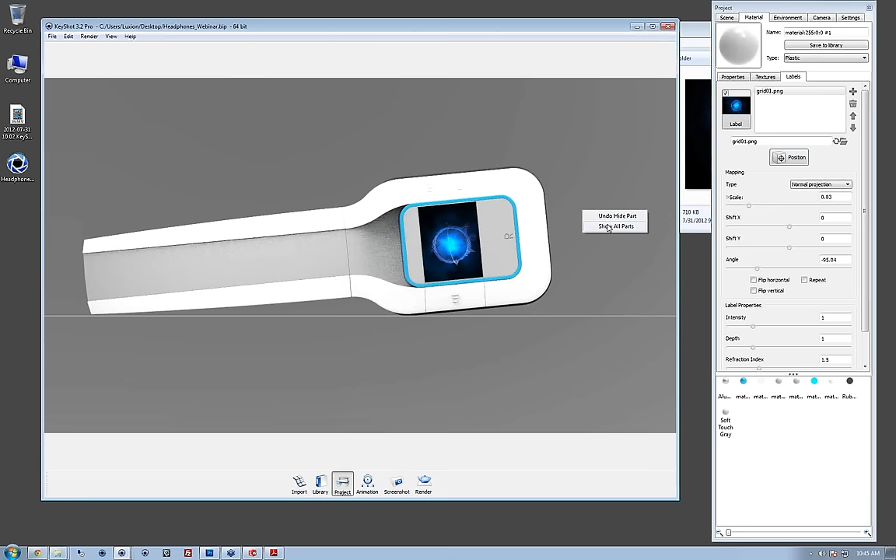Now normal projection mode should work fine for this, and if we click position in the center of our object there, it will position it. And looks like the angle needs to be adjusted here. Because we've separated that inside surface, the label isn't spilling over into these other parts. So that looks good there. And we'll right click and show all parts to get that glass in there.

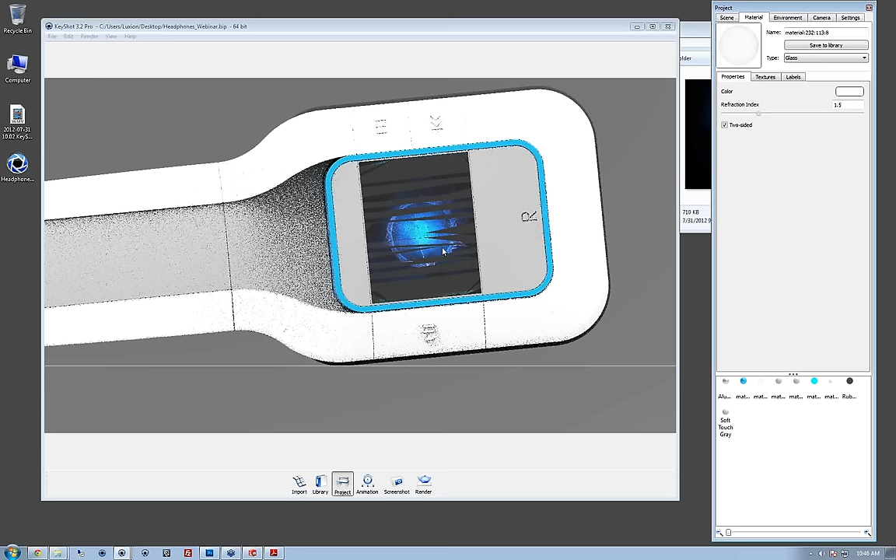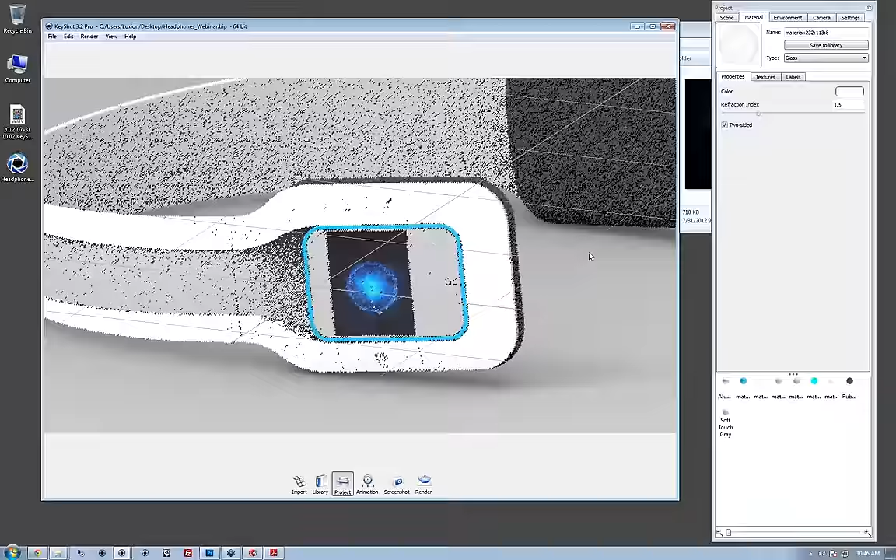So if you ever run into an issue like this, where you're seeing these two surfaces in direct contact, this is what we call Z-fighting. So in order to fix this, you could approach it in your modeling software and create a little gap between those surfaces. Or we could even do this in KeyShot by moving the part just a little bit to remove that. So we still have our glass set in there, but we moved it just enough so that the inside surface of the glass and the surface the label is applied to are not Z-fighting anymore.

So let's hide our ground grid. We know that's positioned well. The image I showed you had two headphones in it, but looks like we're running low on time, so for now I think I can show you everything I need to with just one of these headphones in the scene here. So let's get started on our environment.

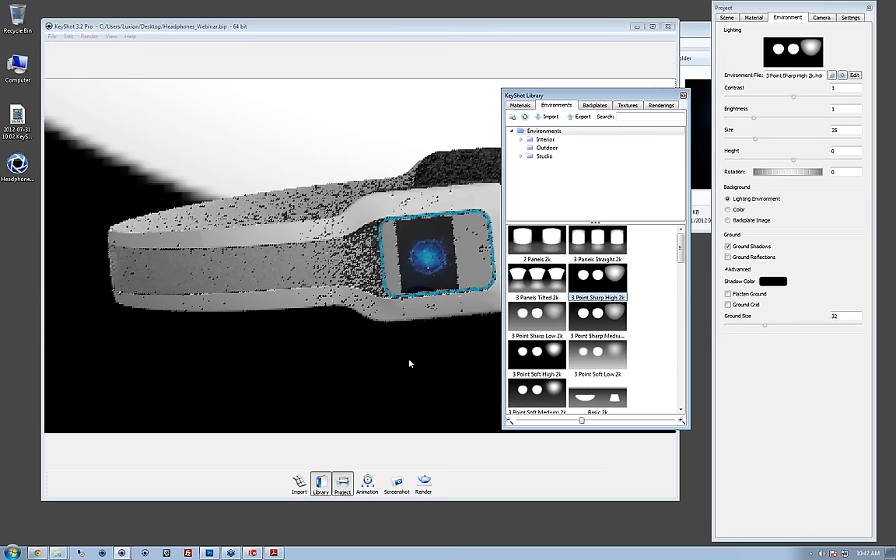The default environment is the startup HDR, which has very low contrast between the darks and the lights. You see we have a nice light ceiling, but it's not illuminating our product in a way that really highlights it. So what you want to do is find something that does have a lot of high contrast. So maybe something like this here. We could always press C to show color or E to show environment. And for those of you who don't know, K brings up the hotkey menu, and this is another very useful tool that you should refer to while using the software.

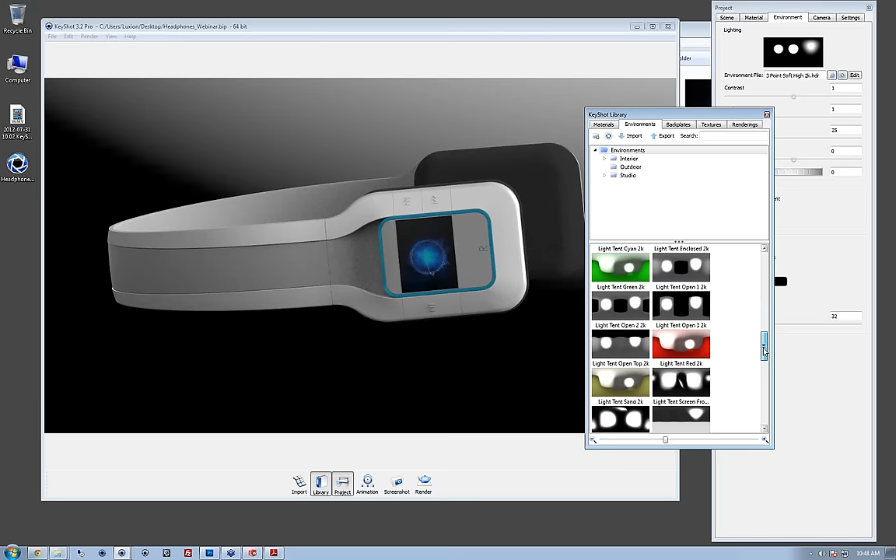So that environment isn't working too well. We can try one of these overhead panels. I personally like to use environments that have a darker shade on the floor with a lighter value on top. That way the surface that's underneath is going to be darker than the surface that's on top. If we were to apply something with a white floor, you can see it illuminates this underside, and that's not really accurate for what we're trying to show here.

So you can go ahead and rotate your environment using Control and the left mouse button. It helps to have a color back there so you're not distracted. So you can rotate this to find something you like. If, say, you like this reflection that comes across this corner here, these buttons are illuminated nicely, but this is too dark here. In the KeyShot 3.2 Pro version, you can go into your Environments panel and edit using the KeyShot HDR editor.

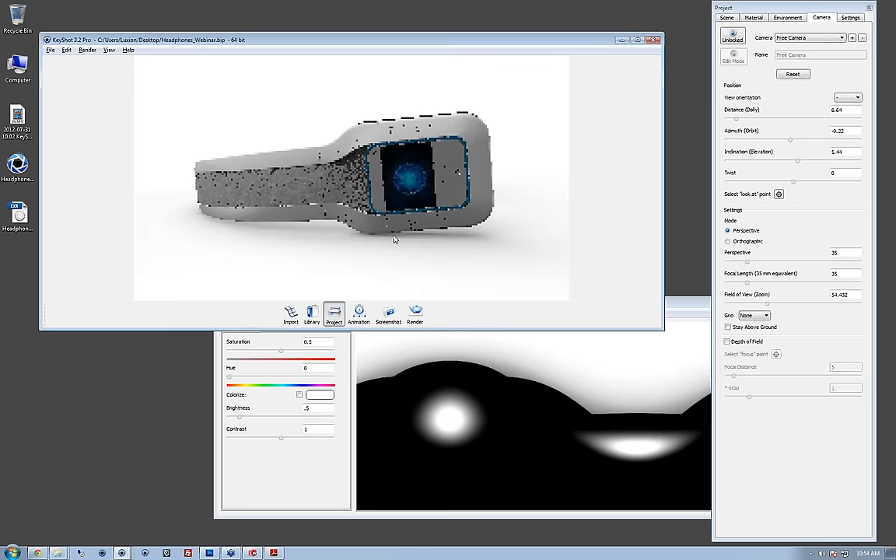But we'll go back to perspective here, and you can see it's pretty exaggerated. For product shots like this, often the photographer is farther away with a zoom lens. So usually 35 is a little too close for me. I like to do 50 or maybe 85, and then we can dolly back out and set that up there.

So the lighting, setting up the lighting is definitely the trickiest part to this whole setup, and to working with KeyShot in general. So it might take a bit of time for you to find where these pins should be located in order to achieve the right amount of highlights that you're looking for. And you can always adjust your values here, decrease the fall off to sharpen that highlight.

We can decrease the size of that if we wanted to create a sharp highlight here, and we can bring up the brightness. So really, when lighting a scene like this, you want to make sure that the surfaces facing downwards are obviously darker than the surfaces facing towards the light. So it will take a little bit of fussing around and finding where these pins belong, but you can achieve a very nice shot once you do have those set up.